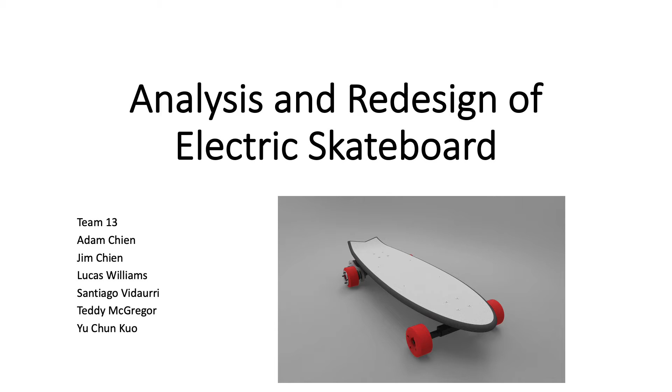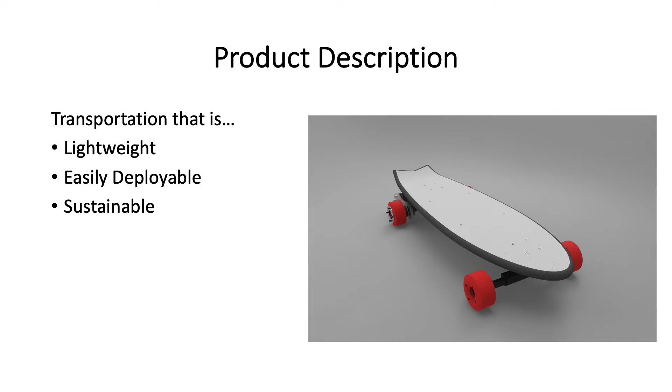Today we will be presenting our analysis and redesign on the electric skateboard. Electric skateboards are lightweight and easily deployable transportation for users to travel between two locations with minimal effort and preparation. The main power source of the electric skateboard is a rechargeable battery, making it also sustainable.

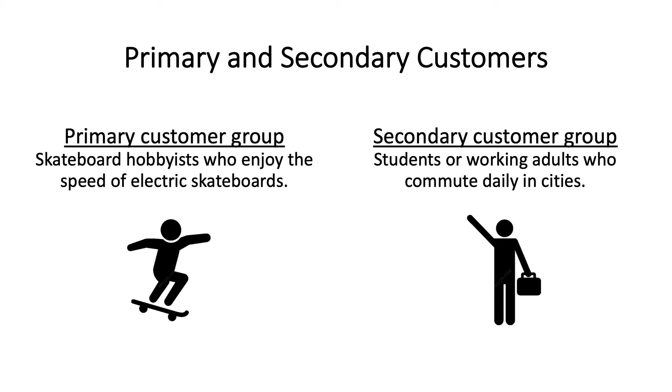We have divided our customers into primary and secondary groups. Our primary customer group is skateboard hobbyists who enjoy the speed of electric skateboards. And our secondary customer group is students and working adults who require transportation for daily commutes.

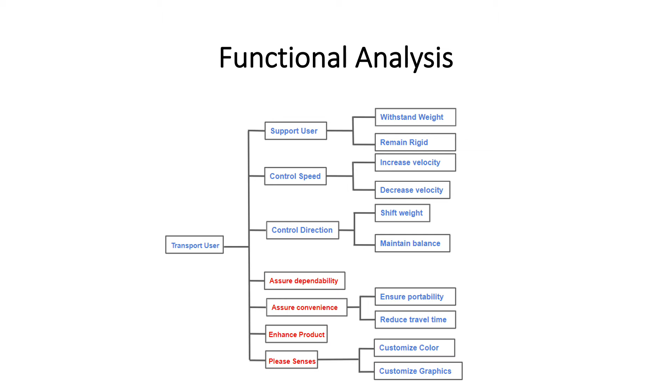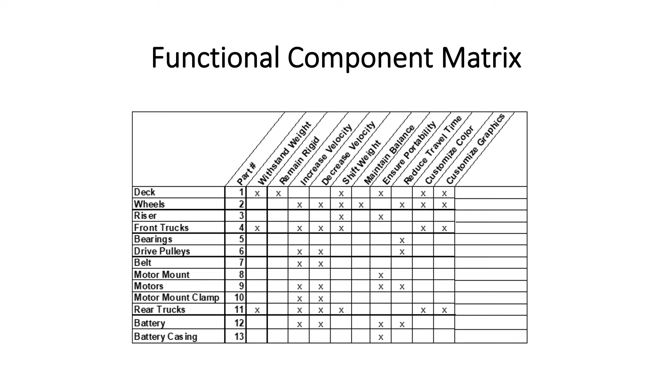This figure shows a functional analysis of the skateboard. The main function of the skateboard is to transport the user, with supporting functions of supporting the user, controlling speed, and controlling direction. This table shows a functional component mapping matrix. The left side of the table lists all the components used in the skateboard assembly. Each part is assigned to a specific task of the supporting function from the functional analysis listed on the top.

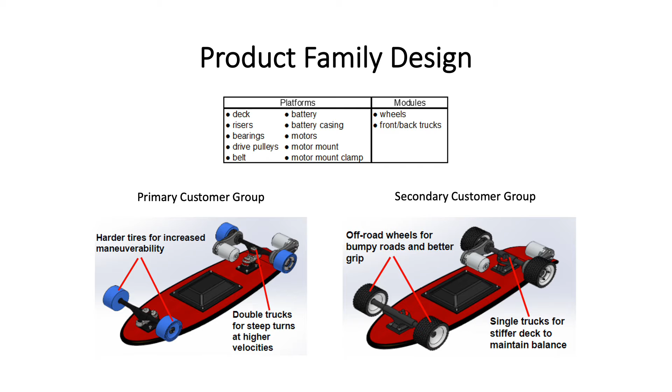To differentiate design for primary and secondary customer groups, we have identified two modules for design changes, as shown in the first table. The bottom diagram shows the individual design for respective customer groups. The modules on the left allow skateboard hobbyists to make steeper turns at higher velocities. The modules on the right facilitate balancing for commuters while they travel through uneven terrains.

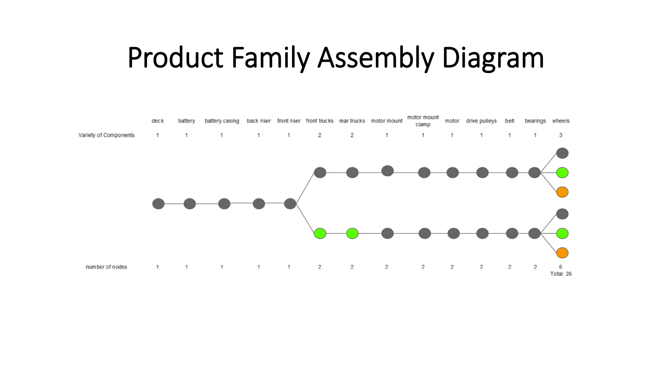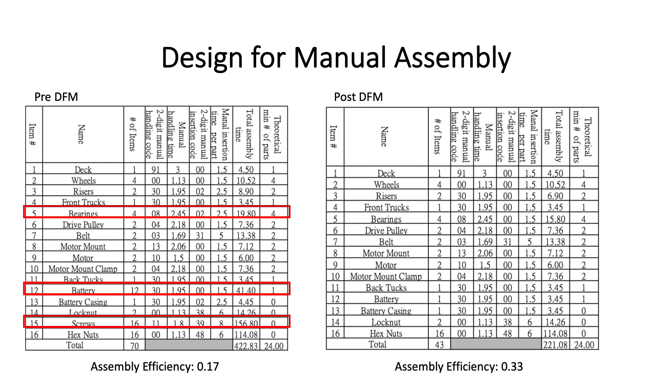For designing for manual assembly, based on the assembly sequence in the product family assembly diagram, we calculated the total assembly time and efficiency for manual assembly. For the platform, we could see the assembly time of battery, screws, and nuts are relatively high compared to other parts. For module parts, we could see bearing might be a redesign opportunity. After redesign, we could save up to 200 seconds total assembly time and increase the assembly efficiency from 0.17 to 0.33. We redesigned three parts for manual assembly, which are bearing, screws, and battery.

We add an alignment feature into the bearing by adding a notch and groove. We eliminate the screws to minimize part count by combining screws with the risers and battery casing, which also work as alignment features. The last one is battery. We modularize the original 12 small battery parts into a single subassembly, which also decreases 38 seconds of assembly time.

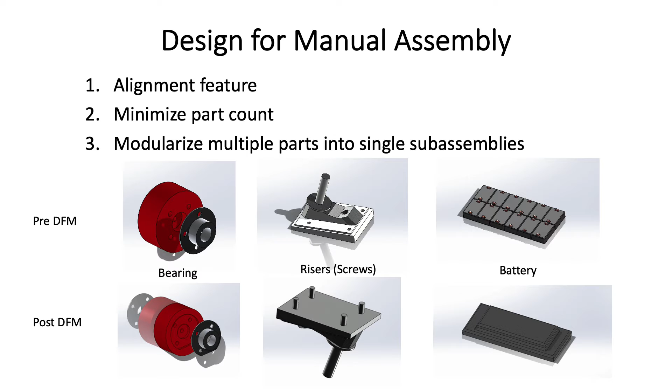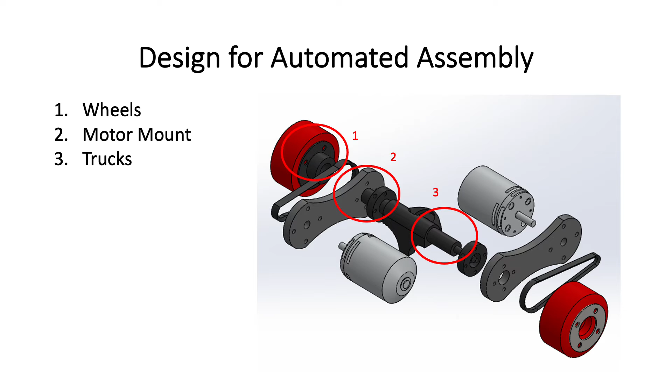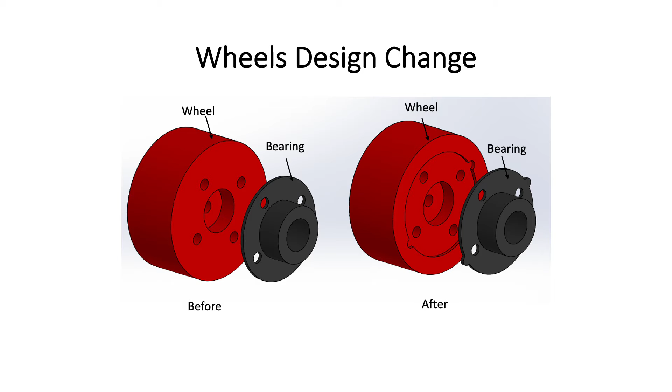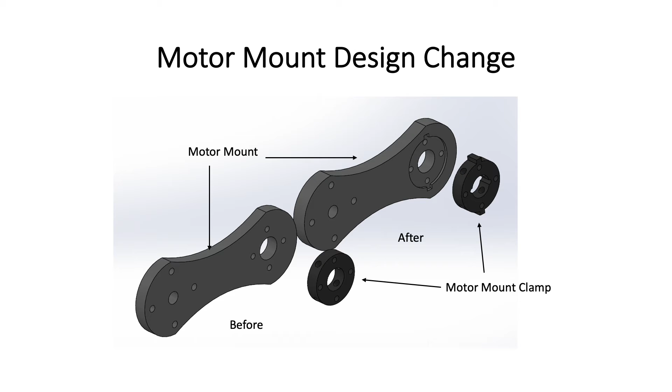As you can see in this figure, the new wheels now have an extruded cut on the inner surface so the bearing can be fitted easily without aligning the holes. The motor mount also includes a similar feature that reduces the insertion time for aligning the holes between the motor mount and motor mount clamp. Finally, the trucks now have a protrusive feature for easy alignment and securing of the motor mount clamp, as highlighted in the figure.

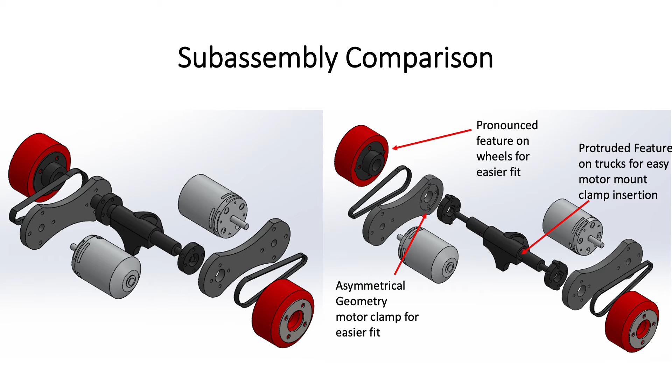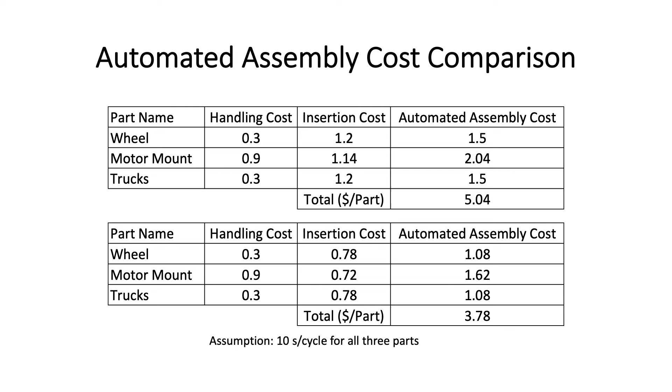Here are the manufacturing processes for the wheel, with a key dimension being a hole for the bearing fit. It is important the bearing is snug on the wheel so it is not wobbling while riding the skateboard. After looking at the parameters for the manufacturing processes, it was determined that injection molding and machining were two methods, as discussed in the lecture, that could work for the wheel. Injection molding would be an easy way to get the exact shape of the wheel, and machining could be done easily with a machine like a lathe.

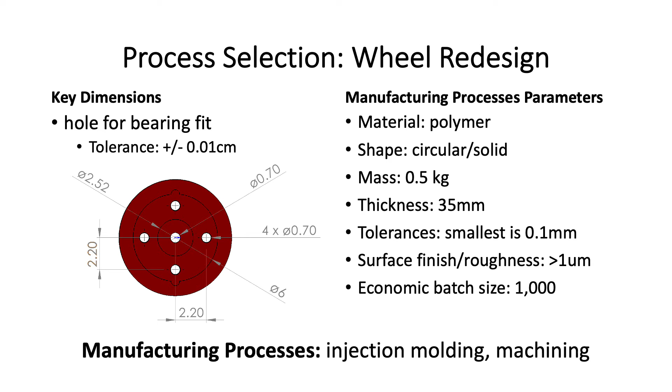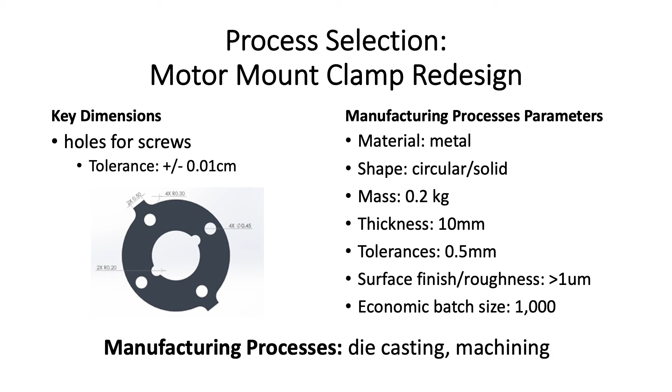And after looking at its parameters, it was determined that die casting and machining were two processes that we discussed that would work. Machining would be very possible to make all these holes and inlets with a lathe, and die casting would also work with this material.

For the wheel, through the process selection, we choose injection molding as the process method and assume polycarbonate as the material. We only focus on the primary process and ignore the machining process, which is used for drilling the 5 standard same-size holes. In the original design, 4 holes are smaller than the middle one.

Then, we calculate the cost difference between before and after following the cost formula for injection molding. First, because of the reduction of the volume, the material cost reduced almost 3%. Then we know that the operating cost for the redesigned wheel is 1.7% lower than the original one.

And the assembly cost greatly reduced by 28% because the groove makes the assembly process easier and faster, especially for the insertion step. The symmetrical semicircular grooves can let a bearing fit in more easily compared to only one groove or non-symmetrical grooves.

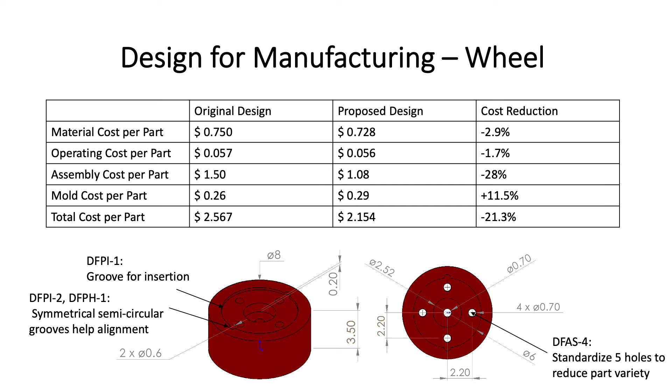However, the mold cost gets higher due to the more complicated design, especially more surface patches in the redesigned wheel. But the total cost compared to the original design is still lower by 21%. Therefore, it is the suitable way to reduce the cost of the wheel.

The second part we selected was the motor mount clamp. Looking at the pictures below, you can see a number of ways we're able to redesign the motor mount clamp to reduce total costs and increase manufacturability. The design guidelines we followed were adding grooves for easy insertion, standardizing the holes to reduce part variety, and adding features such as the stubs in the top and bottom for orientation and alignment.

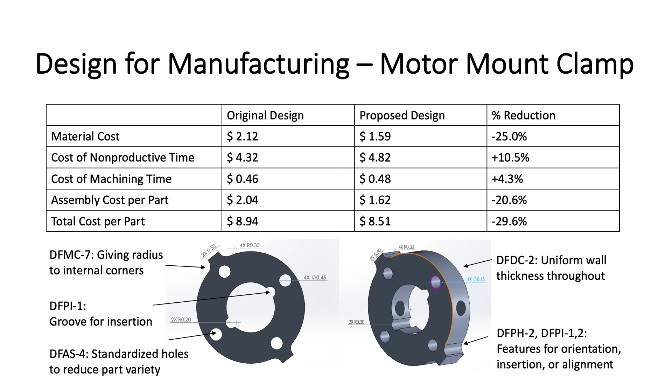Having an optimized product to serve most customer needs, we can shift focus to improve the experience. We introduce a mobile application as a PSS to maintain engagement and provide enhanced features. With full customization and support, the user can tailor the ride experience to their liking and access a larger community of users. Adding Bluetooth capability allows the user to fully control the board with their smartphone, access battery and range estimate, and more.

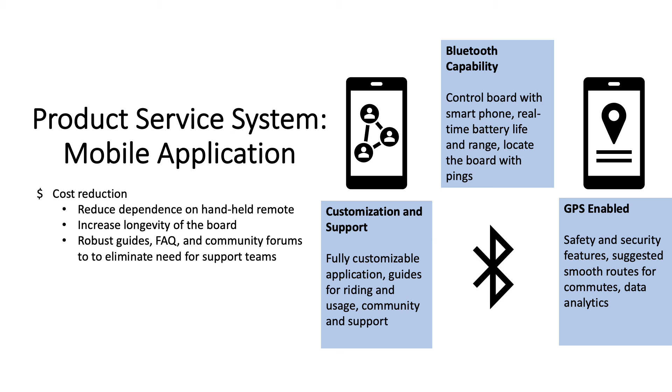This application integrates with onboard GPS to provide enhanced safety and security features, suggesting routes and providing real-time data analytics for your trips. All of these come with reduced costs for the customer. The remote can be sold separately, the longevity will increase with future-proofing updates, and we can provide an extensive FAQ and community forums to reduce the need for support teams.

Our mobile application can also help reduce our impact on the environment by suggesting eco-friendly routes to optimize battery life, offering a modular battery design and accurate life estimates to allow for quick swaps. Without the need for a physical remote, we can reduce the carbon footprint of our manufacturing process through smartphone integration. We can push complementary software and firmware updates to increase the efficiency, range, and longevity.

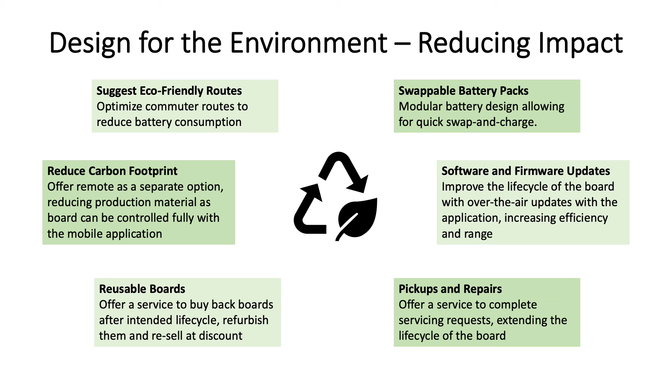Offer a service to buy back boards if they're past their lifetimes, to refurbish them and keep them away from our landfills. And offer a pickup and repair service to extend the life cycle of the boards.

In conclusion, our redesign of the electric skateboard has resulted in a hobbyist board for thrill seekers and a commuter board for fast and easy transportation. The redesign has optimized manufacturing and assembly as well as reduced costs. However, the production process can be further consolidated.

Further improvements include compatibility to charge with existing EV charging networks and an accurate mapping of the charging networks in our mobile application. If we were to start fresh, we would further simplify complex parts on our board and consider adding varied powertrain and board style product lineups.